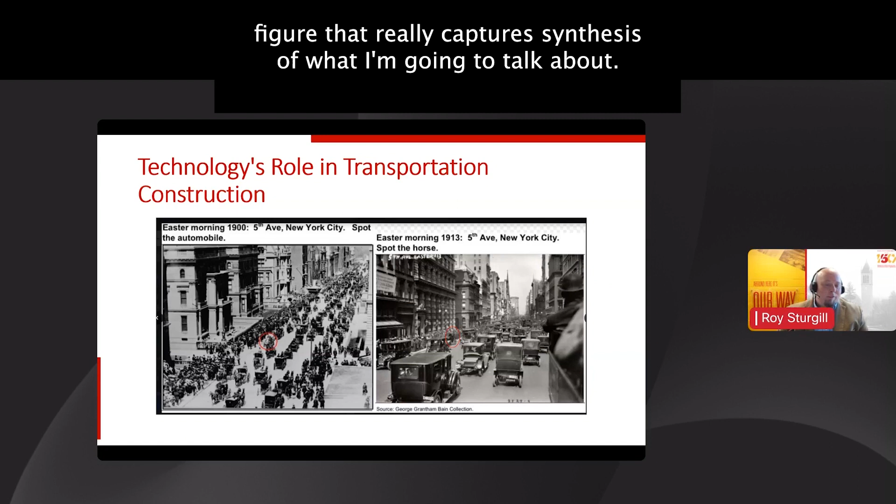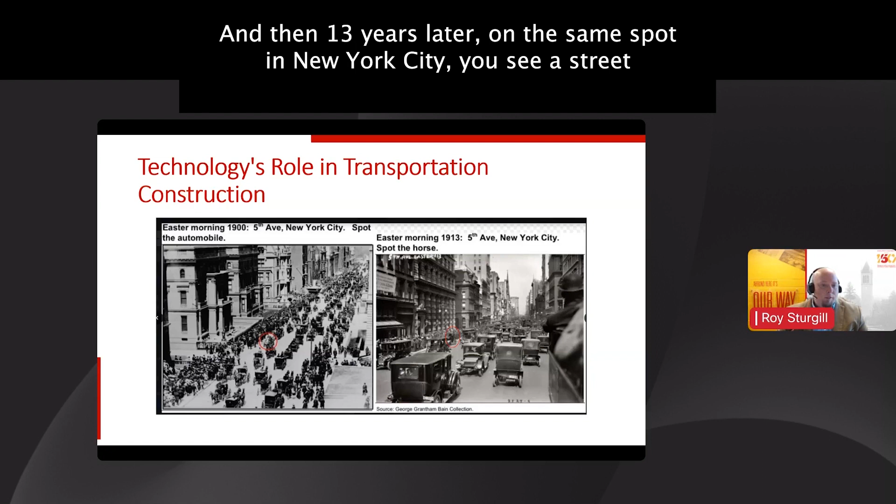I would like to start the talk today with this figure that really captures the synthesis of what I'm going to talk about. This is two photos on Easter morning, around this time of year. One is from 1900 of Fifth Avenue in New York City, on the left, showing a lot of horse-drawn carriages with one horseless carriage, as they called them at the time. Thirteen years later, on the same spot, you see a street full of cars and automobiles with only one horse-drawn carriage. The intent of the picture is to show how, in such a short amount of time, advancements occurred and technology changed society.

So that's what I want to talk about today: how technology has changed transportation construction. I want to tell the story through my own timeline. As David mentioned, I joined Iowa State in 2019 as an assistant professor in our construction engineering group. Prior to that, I started at the Kentucky Transportation Cabinet, which is the DOT in Kentucky, in January 2007.

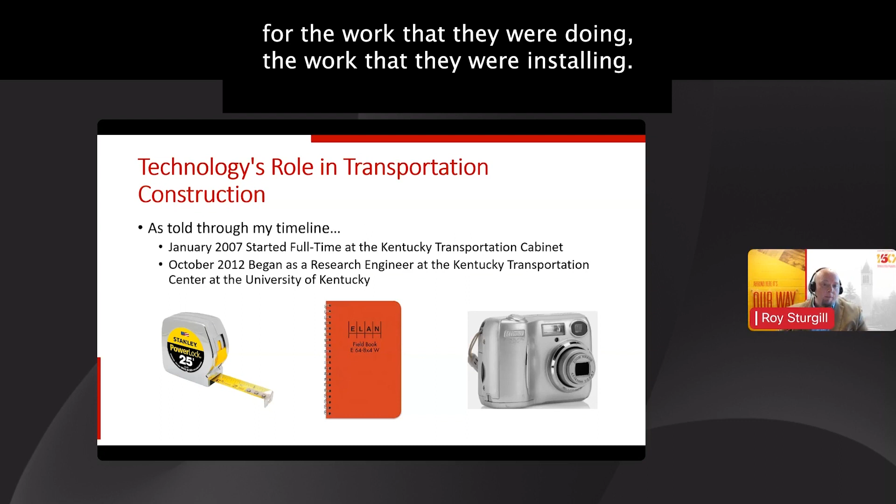At that time, I was in the field quite a bit. I conducted construction inspection, managed construction projects, and had to do a lot of documentation, a lot of measurement, a lot of making sure that the contractors were getting paid for the work they were doing and installing.

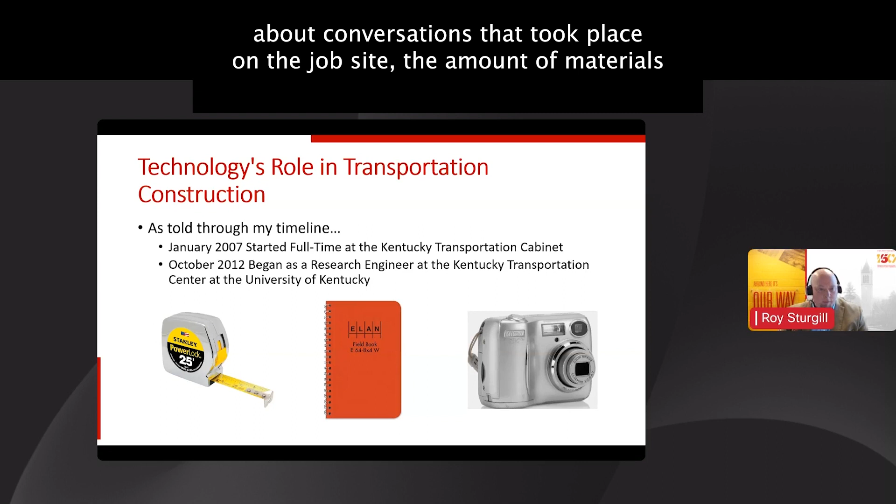Some of the primary tools of the time, the technologies I was using out in the field, were things like a tape measure — any inspector was going to have one close at hand. You also went everywhere with your field book, filling it out with information about conversations on the job site, the amount of materials measured, what needed to be paid for, issues, documentation, those kinds of things. At the time, you'd also find folks with just a normal digital camera to document those things.

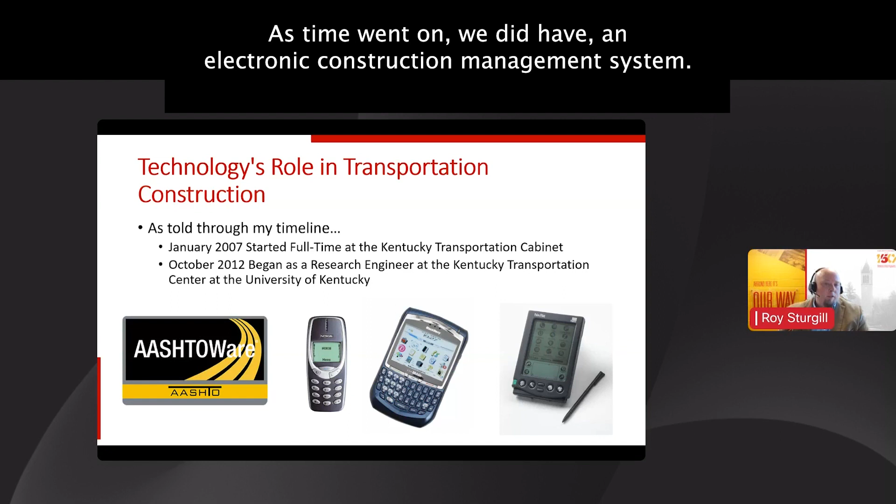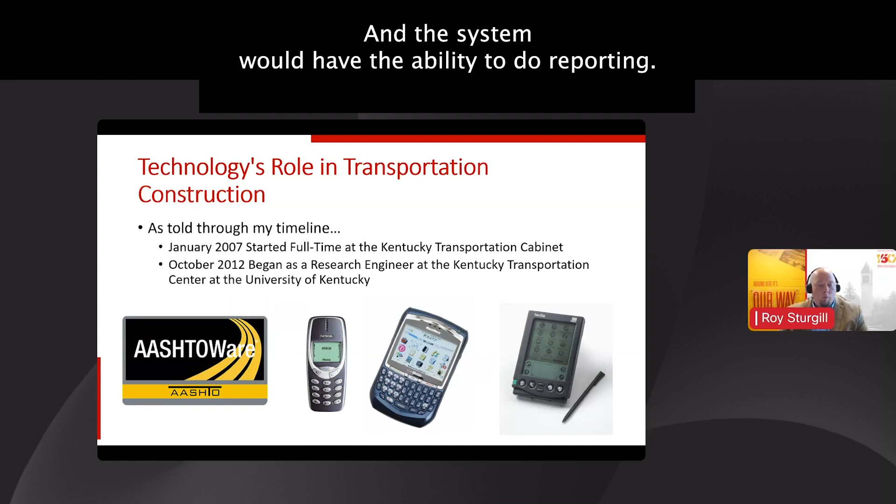As time went on, we had an electronic construction management system — an AASHTOWare product called Site Manager — but you didn't really have much access to it out in the field. You'd use the field book, take your notes, and then when you got back to the office, maybe the next morning, you'd transfer your notes and measurements into the system. The system could do reporting, help generate payments to the contractor, and process certain things with some level of automation and workflow, though still pretty high level.

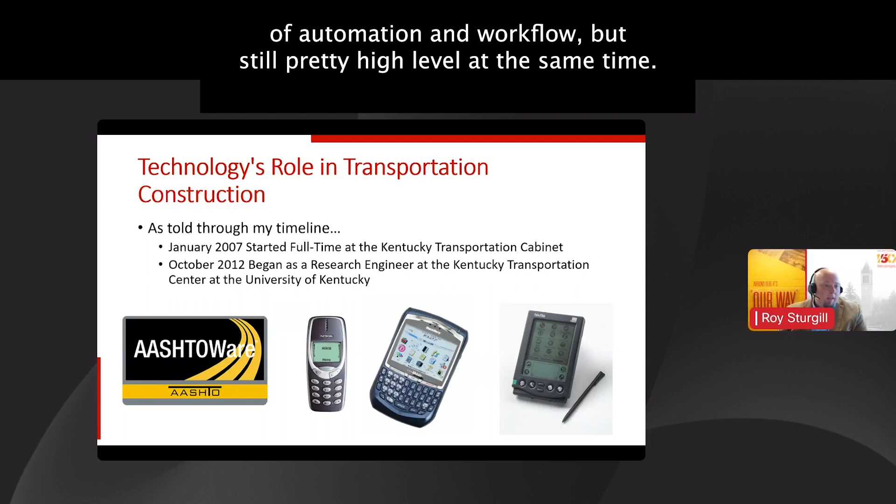At the same time, I counted myself lucky to get a state-issued cell phone. Pretty early in my career, around 2008, about a year after I started, I was issued a Nokia phone with very low functionality — essentially you could just place phone calls. We weren't even supposed to be using it for text messages at the time. So a pretty low-level technology mobile device out in the field.

But a few years later, I was actually issued a BlackBerry. If you don't know what a BlackBerry is, it's a mobile phone with a full keyboard integrated into it. It was a useful piece of technology — I at least enjoyed it. Wish I still had my BlackBerry some days.

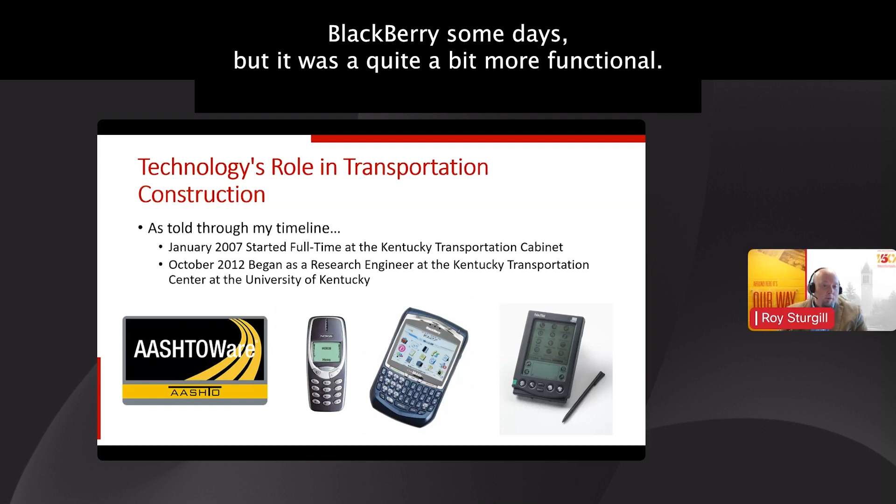But it was quite a bit more functional. You could respond to emails and enter information pretty easily. That was a decent piece of technology that I was issued while being at the cabinet.

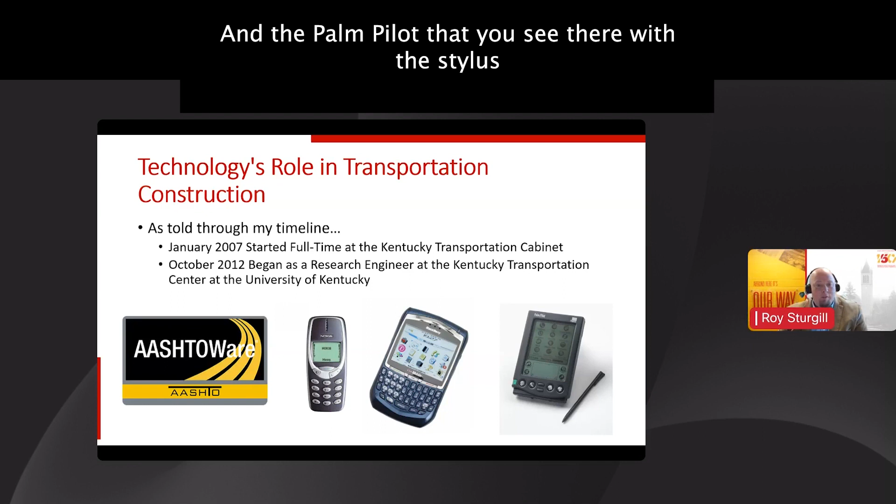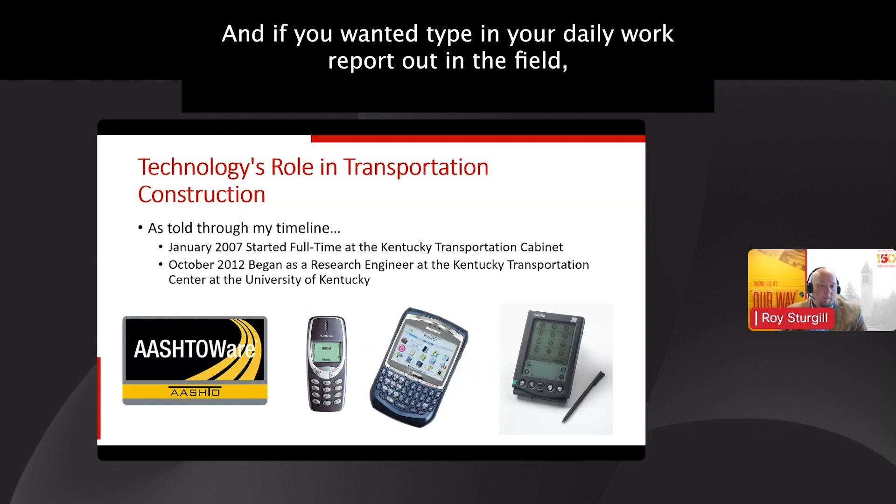I bring this up because we're going to talk about technology implementation today. The Palm Pilot with the stylus is an example of a technology we tried to implement at the Kentucky Transportation Cabinet, and it was pretty much a failure. There was an application on that Palm Pilot that could integrate with the AASHTOWare Site Manager software we used. If you wanted to type in your daily work report out in the field, you would meticulously use the stylus and enter each letter on the keypad that popped up on screen. Some of the issues were related to people, some to technology, and some to process—we'll talk more about those later in the presentation.

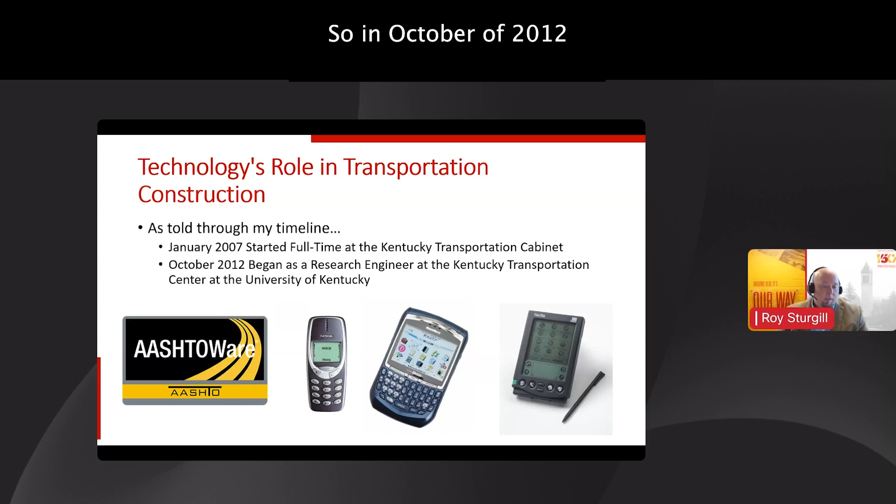In October of 2012 is when I actually left the Transportation Cabinet. I went to the University of Kentucky as a research engineer in the Kentucky Transportation Center, and shortly thereafter is really when I became interested in technology.

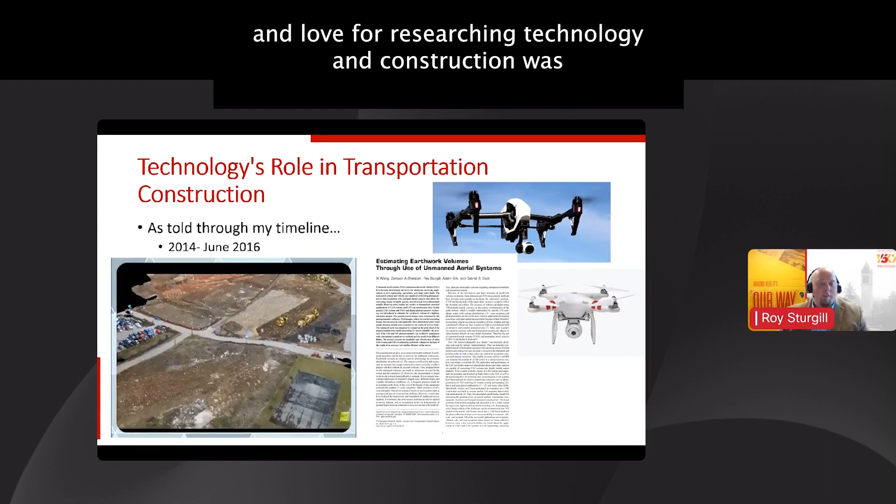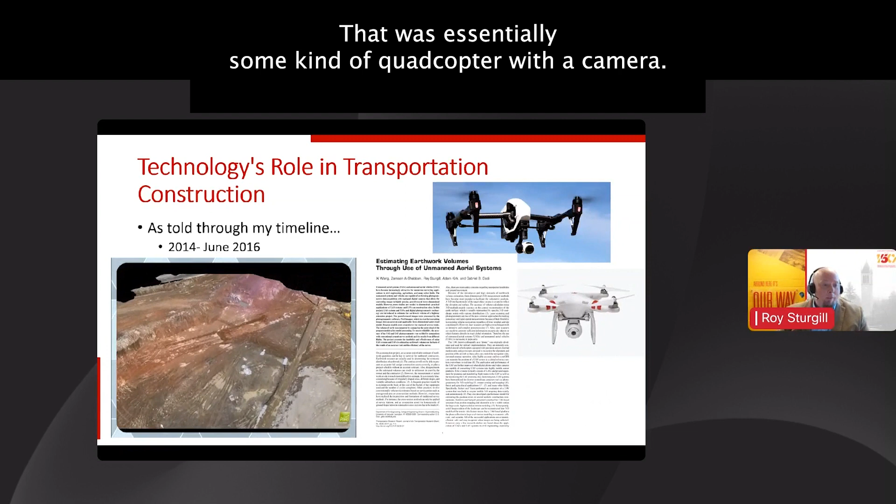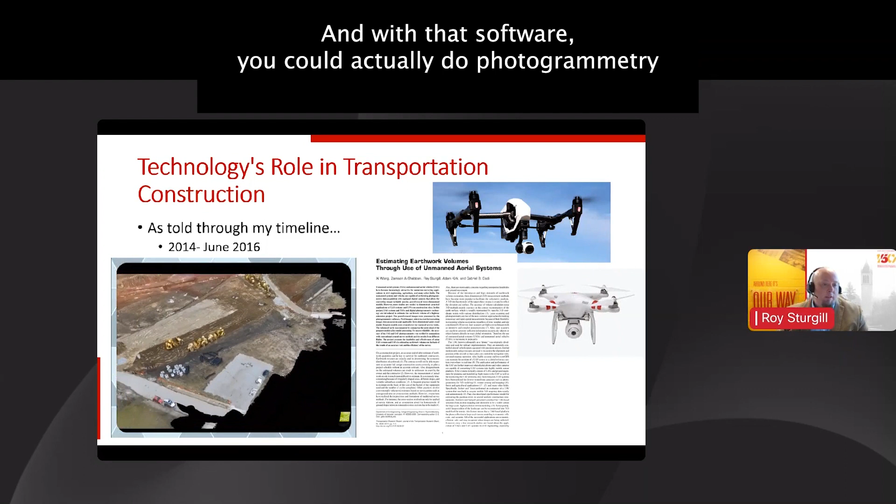One of the first pieces of technology we started researching, where I really found this passion for researching technology in construction, was when we got to operate what we called drones at the time, or unmanned aerial systems—essentially a quadcopter with a camera. We at first just used them for aerial photography or videography, but then found you could use software like Pix4D, which was used to capture the model video being played there, to actually do photogrammetry. The GPS on those unmanned aerial systems was advanced enough that the photogrammetry would come out pretty well done, and with some ground control points you could get really good data, which was the source of the paper shown there, estimating earthwork volumes through drone photogrammetry.

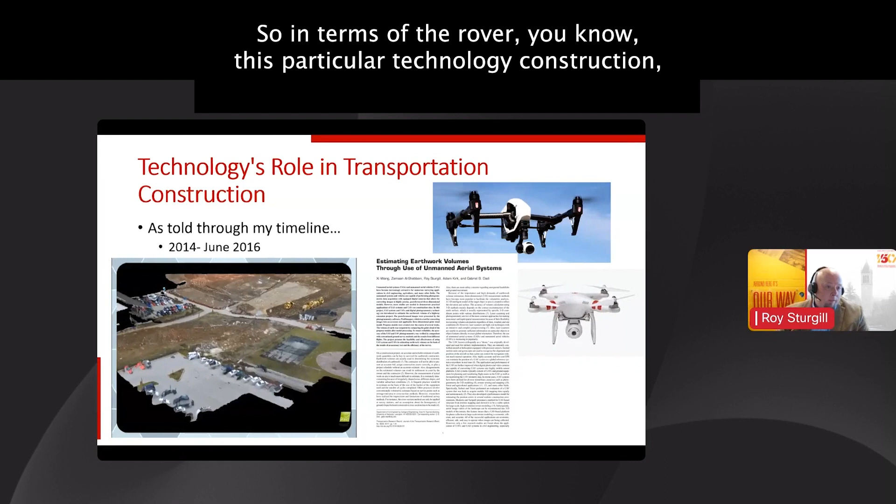In terms of the role of this technology in construction, you could use it to estimate how much earthwork was done in a given day by flying the site in the morning and again in the afternoon, calculating the earthwork volume differences between the two times.

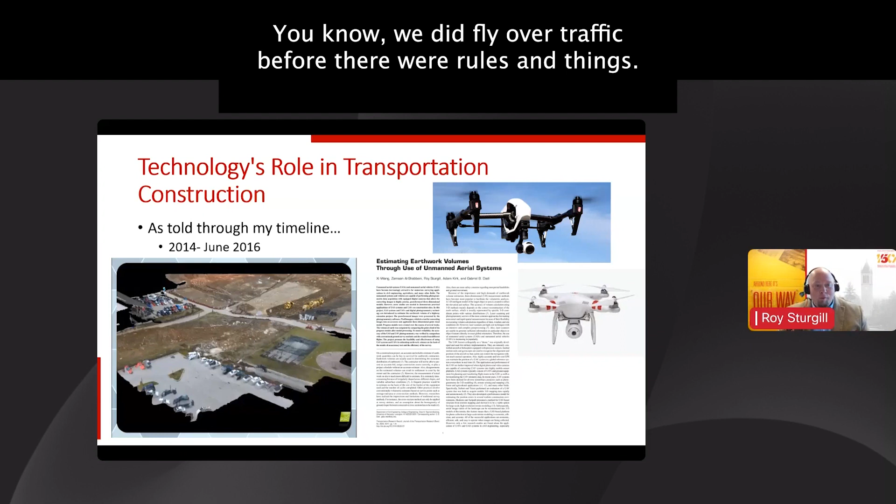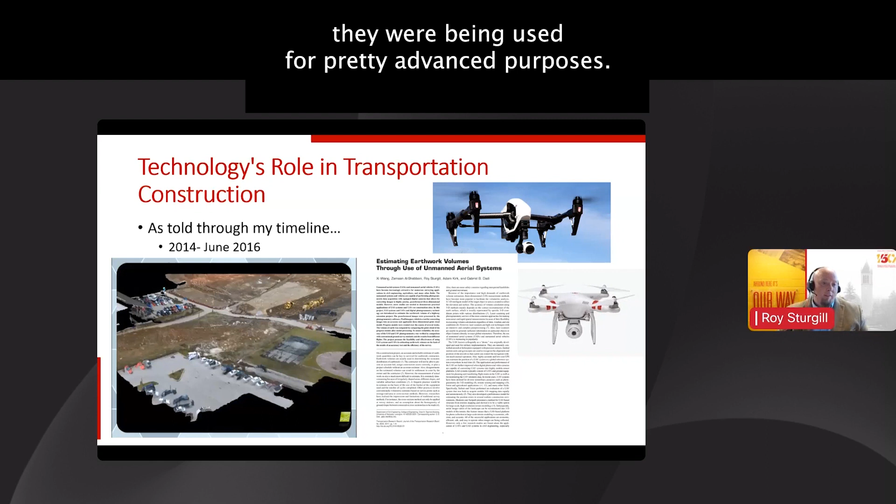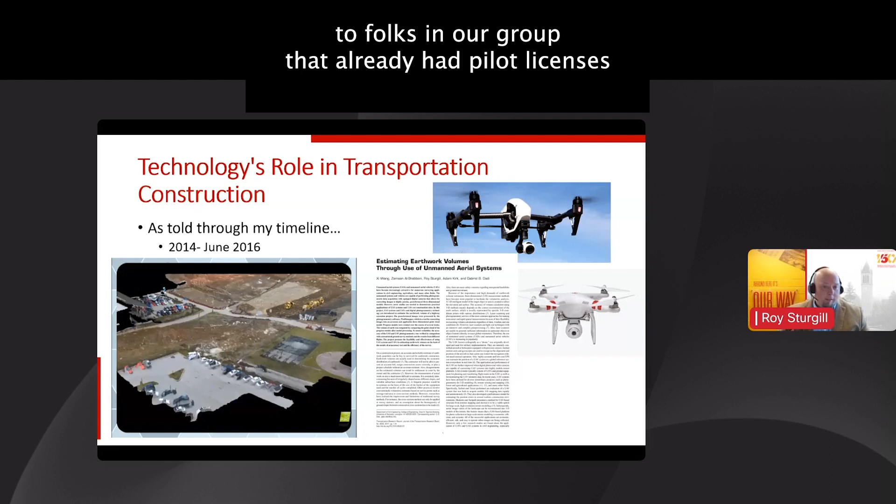One issue that happened—I'll admit maybe there were some things I did that the FAA wouldn't be exactly happy with. We did fly over traffic before there were rules in place. In June of 2016, the FAA issued guidelines, because with technology advancing so quickly, we don't always have the rules or processes in place to implement or adapt to them. This is an example where the policies weren't there yet—these drones looked a lot like toys but were being used for pretty advanced purposes. The FAA had to come out with a policy that included training folks on how to use these things appropriately and safely. Rather than myself getting licensed as a drone pilot, we shifted that to folks in our group who already had pilot licenses, and we moved on to the next thing.

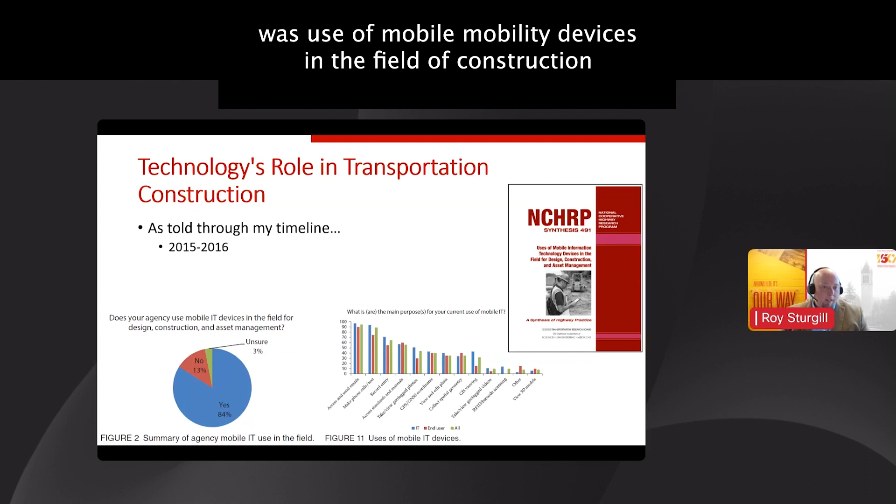As you watch these timelines continue, you see some of the advances taking place, just like going from the horse-drawn carriage to the automobile. Between 2015 and 2016, one of the things we looked at was the use of mobile IT devices in the field of construction, design, and asset management. This goes back to the cell phone and BlackBerry I was issued at the Kentucky Transportation Cabinet. In this study, we did a canvas of all the state DOTs to determine what they were using in the field.

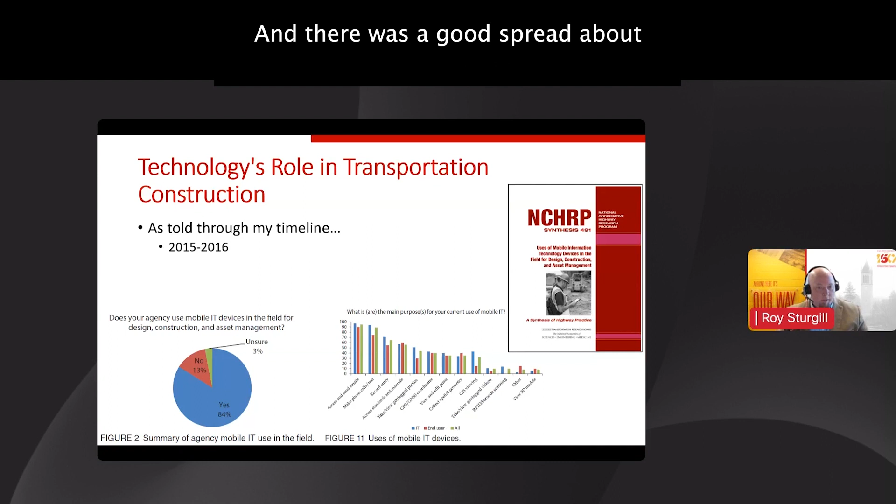As you can note, 84% were using some kind of device out in the field, but there was still a good portion that were not. And there was a good spread about whether it was a bring-your-own-device type policy, or whether it was an issued device, and what the device was, whether it was an Apple or Android device. There was all sorts of variation because the states were still trying to figure these things out.

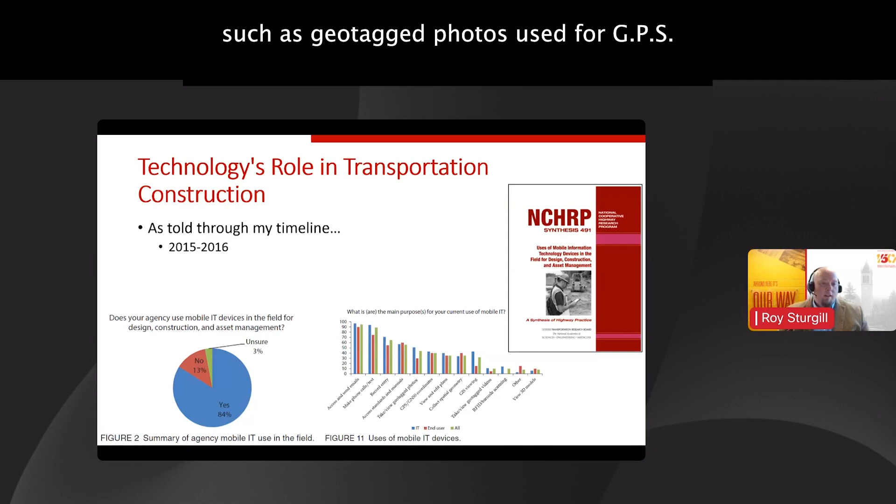For the most part, the use cases of this technology were just to answer emails, make phone calls, send text messages, and to a lesser extent use them in more advanced ways, such as geotagged photos, used for GPS, or even in a very small number of cases to view 3D models, which is something that we're looking at a lot more now.

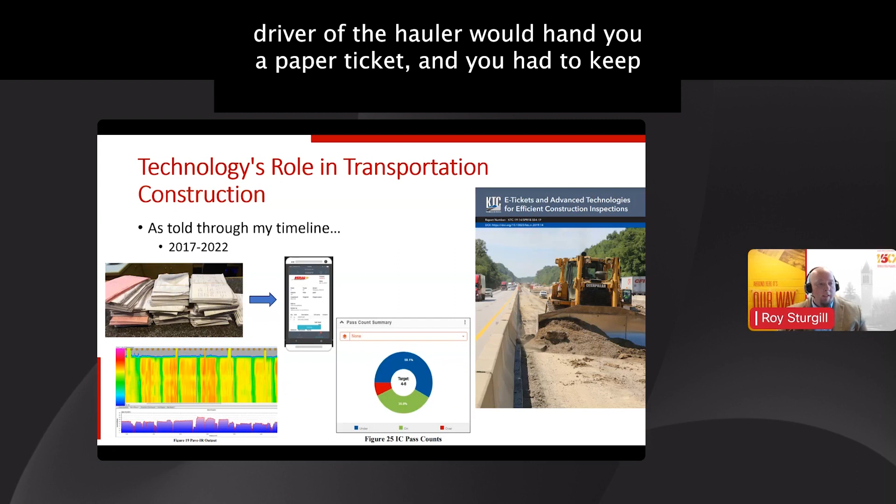The next thing that I got involved with, around 2017, was this discussion of e-ticketing. E-ticketing is basically for bulk materials, whether it's aggregates, asphalt, or concrete. The way DOT jobs would work was the material would show up, the truck driver or hauler would hand you a paper ticket, and you had to keep track of those tickets to determine how much material was delivered on site and verify that was the adequate or proper amount delivered, and that was what was paid for.

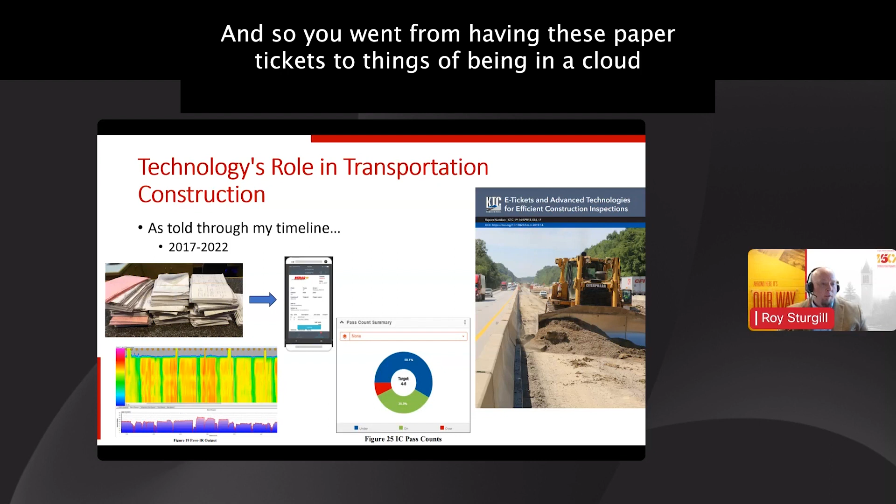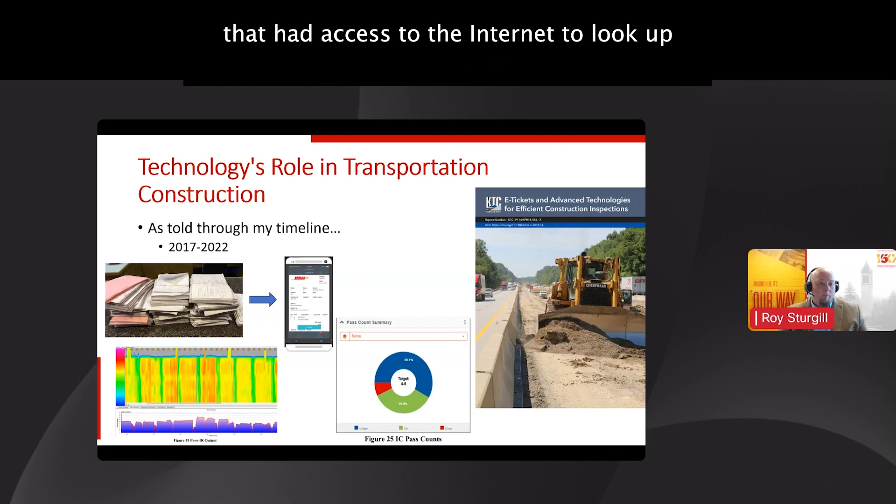So around 2017, it was actually the Iowa DOT who really pushed this concept of e-ticketing. It was out of safety, documentation purposes, and data continuity. So you went from having paper tickets to things being in a cloud with data flow happening automatically. Those tickets became e-tickets accessible by anyone with a mobile application and cellular service, or in an office with internet access, to look up what tickets were being delivered and accepted out on job sites.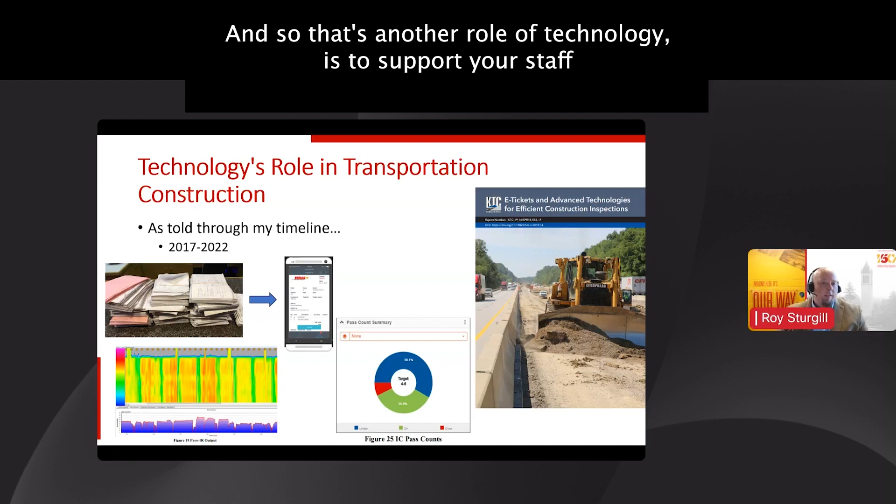One of the things we did in advance of, or in addition to, e-ticketing was try to couple it with other technologies to see how much we could support our field staff. That's another role of technology: to support your staff in the field or your management staff with being more efficient, having better data continuity, more details, those sort of things.

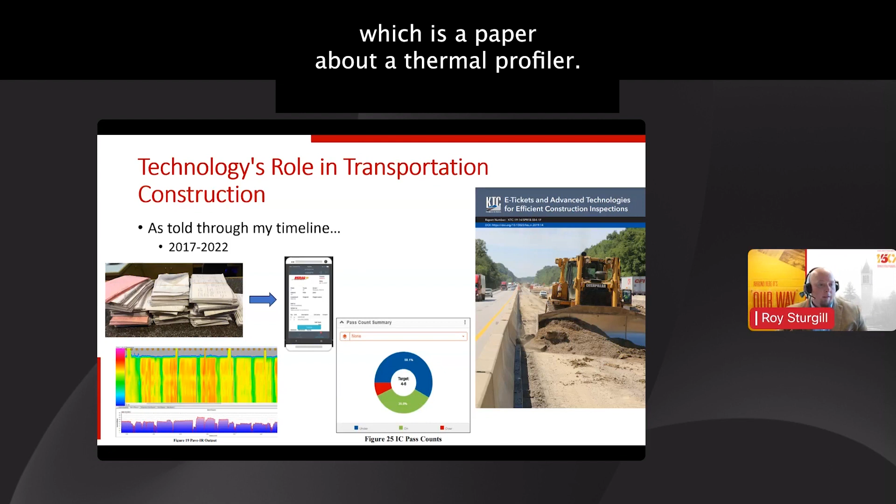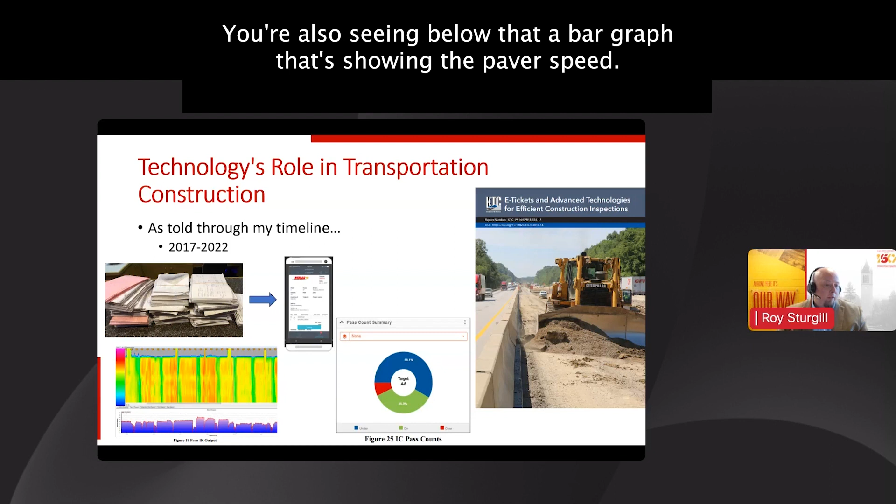This is one example where we used another system called PaveIR, which is a paver-mounted thermal profiler. You can see in the lower photo on the left a bunch of bands - some green bands and some yellow and red bands. That's showing the temperature of a pavement mat across the full width, and green is cooler temperatures. You're also seeing below that a bar graph showing the paver speed. So wherever the paver slows down or nearly stops is where you're starting to get colder spots in the pavement - that might be in between trucks or what have you.

But a colder pavement is not good for the quality of the pavement. So you were able to use this technology to identify potential issues with improving the thermal continuity and those type of things. We also used intelligent compaction rollers, not for their compactive numbers, but to monitor the pass counts or the coverage of the roller on the mat.

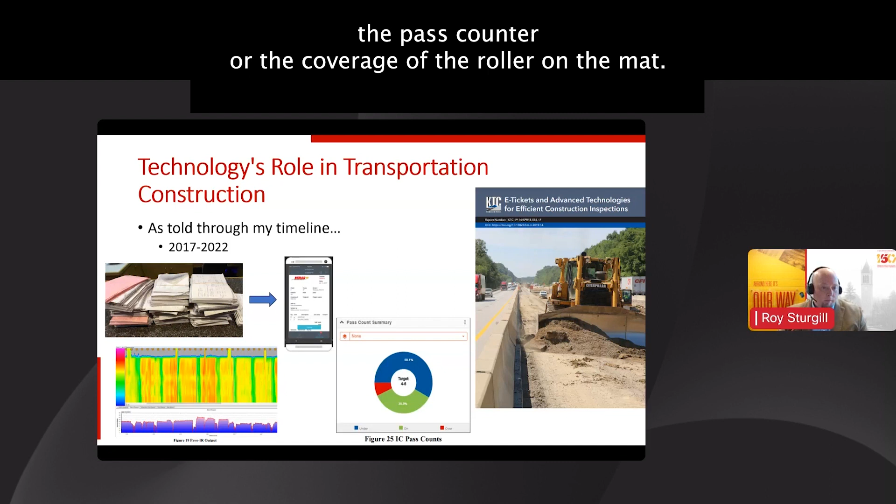So with these three technologies - e-ticketing, the PaveIR system, and intelligent compaction - we were able to couple those together and provide either an engineer or an inspector a lot of data that they otherwise would have had to collect more manually, but this was all being collected through the technology.

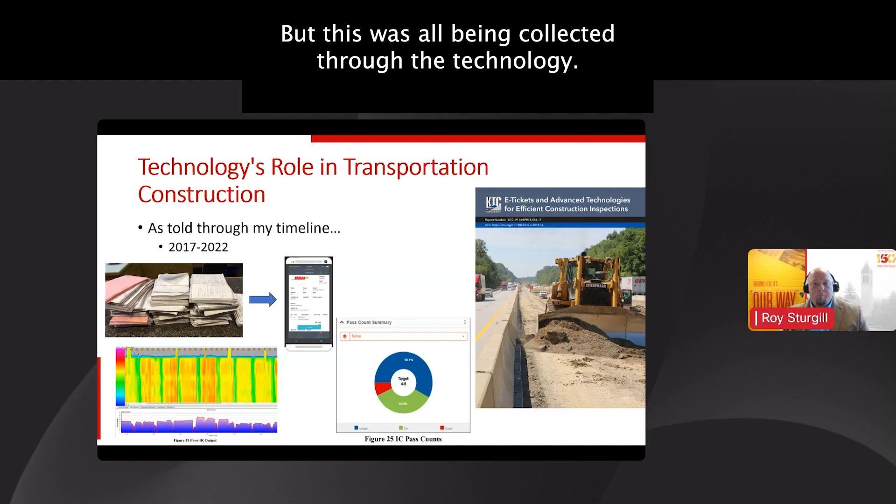But this e-ticketing concept really took hold, so we continued to look into it and actually did another nationwide canvas to determine how states were using it. At the time of this synthesis project, Synthesis 545, there were maybe a couple handfuls of folks who were experimenting with e-ticketing or using it. There were states like Iowa, Florida, Pennsylvania, and Kentucky that were really starting to ramp up their use of it, but it was still kind of new.

At the same time, I was fortunate enough to be asked to be part of the Every Day Counts initiative as a subject matter expert on helping to ramp up the use of e-ticketing.

While certainly that increased the use, there was one thing that increased the use of e-ticketing more than anything else, and that's the COVID-19 pandemic. A lot of times we talk about the pandemic in a very negative tone. However, as technology is concerned, the pandemic really pushed us into making use of some technologies that were just on the forefront, just getting used preliminarily, and e-ticketing is one of those. Virtual meetings too - think about before and after the pandemic, how much more we are using technology day to day.

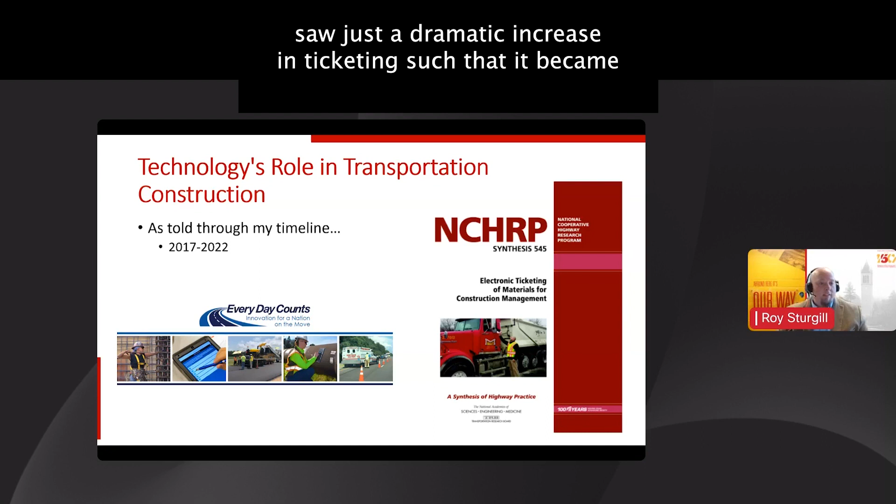So that was one of the positives, it really pushed states to adopt the e-ticketing concept. From 2017 to 2022, we saw a dramatic increase in e-ticketing, such that it became, as part of the Every Day Counts program, the number one most implemented technology of any technology that was part of Every Day Counts.

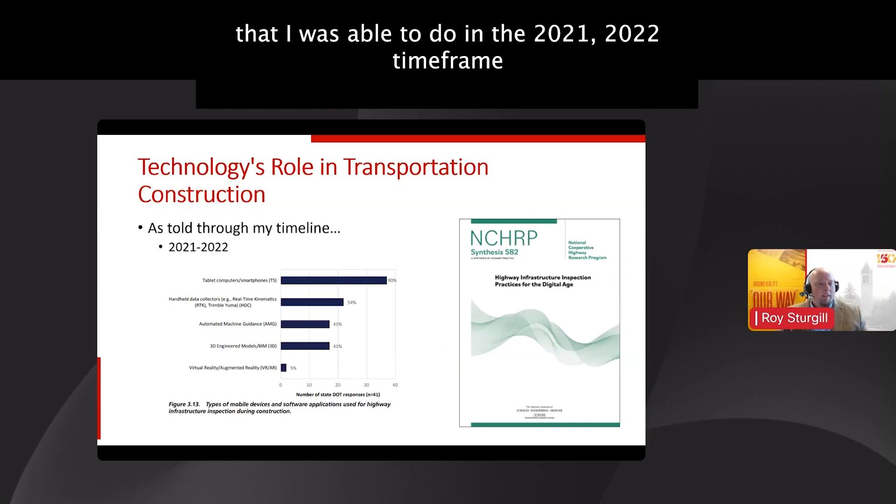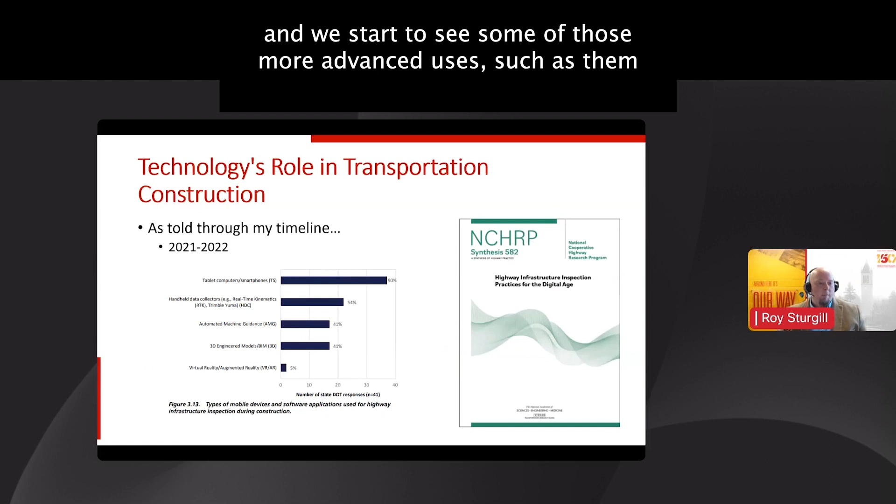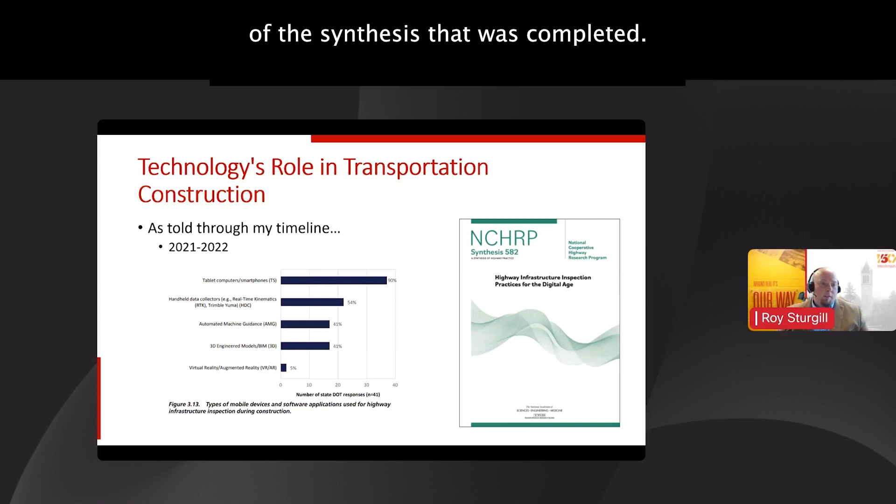That's quite impressive. Continuing on with these synthesis projects, another project I was able to do in the 2021-2022 timeframe was highway infrastructure inspection practices for the digital age. What I want to call attention to here is that from that early mobile IT synthesis to this synthesis, we really start to see mobile devices in the field become commonplace. And we start to see some of those more advanced uses, such as them being used as data collectors, to collect geotagged data, or for viewing 3D models or 3D engineered models, or in BIM practices, really start to ramp up compared to that previous version of the synthesis that was completed. So you see how these technologies in a very short period of time are being advanced in use.

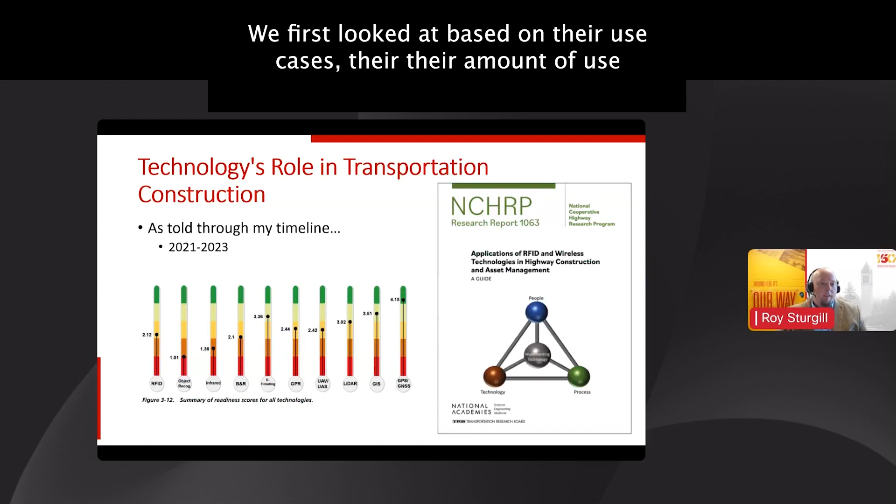One other project I was fortunate to be part of was the application of RFID and wireless technologies in highway construction and asset management. As part of this project, we looked at 10 different technologies and how they were being implemented in the field. We first looked at, based on their use cases, their amount of use by DOTs and that sort of thing, and assigned them a readiness score.

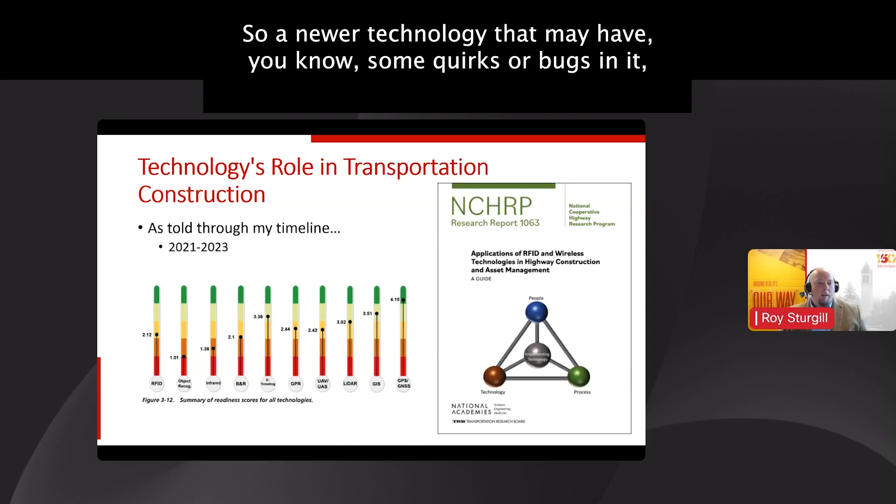But this is really where the concept of the importance of people, process, and technology was highlighted, to make us understand that implementation isn't just about having a good technology. You really have to make sure that the people using it at all levels, all the stakeholders, understand what the purpose is, how it's being used, how it might be useful to make their job easier, more efficient, collect richer details. There needs to be buy-in into the technology. The other thing is the technology has to be mature and ready for the implementation process itself. A newer technology that may have some quirks or bugs in it is going to frustrate people if it's not ready, so the technology has to be there.

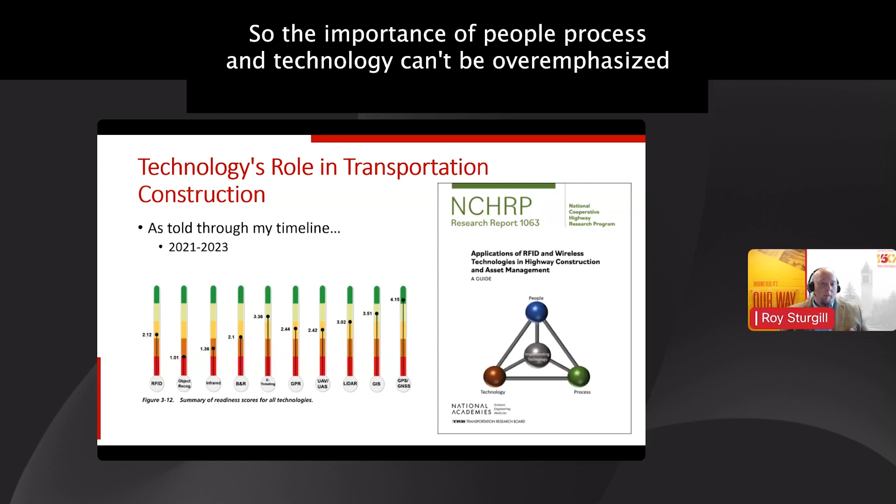Also, the process has to be prepared for any kind of workflows or digitalization of the data that's coming in. There needs to be a place for that information to go, and there needs to be a workflow to help it go from one person to the next through the process. So the importance of people, process, and technology can't be overemphasized when it comes to implementing technologies, especially in construction.

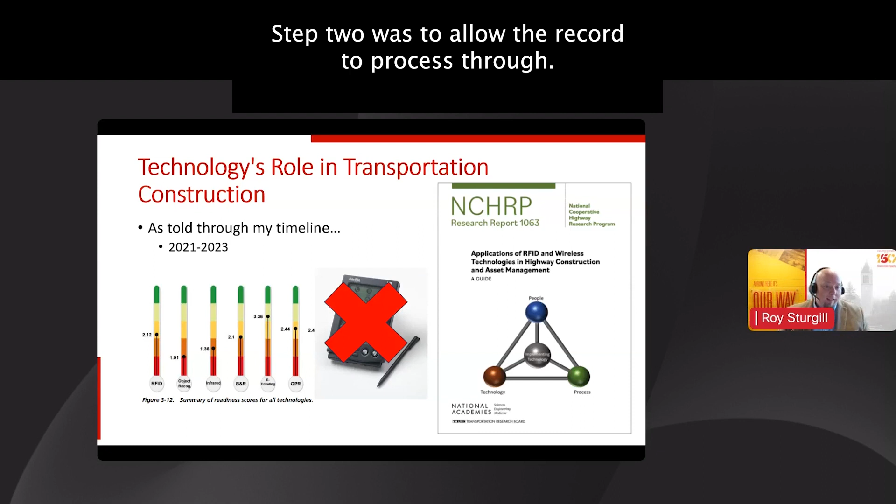So we'll go back to the Palm Pilot that I mentioned before. The technology wasn't quite mature. There were issues with it where you could type in your daily work report - and I did this on a couple occasions - where you typed in the daily work report, and as part of the workflow process that was set up with the technology, step one was to delete your records, step two was to allow the record to process through. So if the workflow of the data from the Palm Pilot to the computer got disrupted by some issue, which happened frequently, the record was gone. So many people lost the time they had spent putting that record in out in the field.

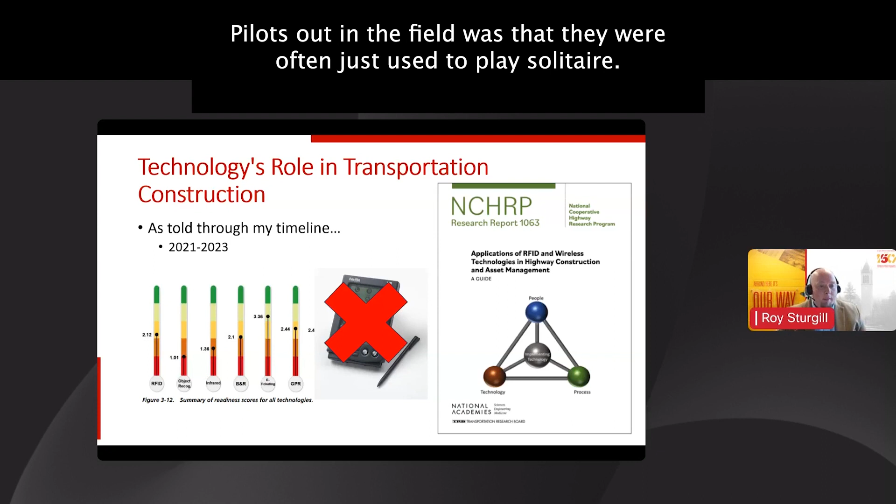So the technology wasn't quite there. The people were never really trained or shown how to use this. And quite honestly, what feedback we got in central office about the Palm Pilots out in the field was that they were often just used to play solitaire. So the people need to understand how to use the technology and how it can benefit them. And then finally, the process has to be set up to where it is efficient.

The data flows completely without being deleted or lost, and all those three things have to work together. That was a really key project in taking the next steps with technology to make sure that implementation can take hold and take place.

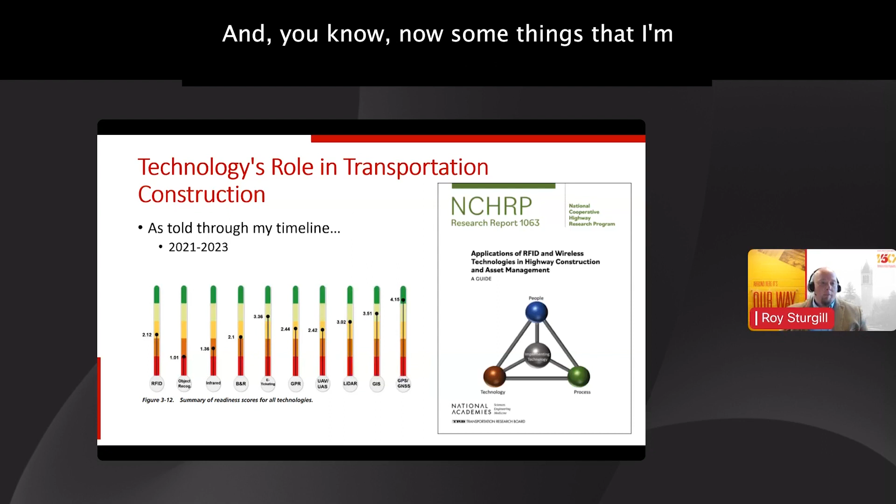That was completed relatively recently, and now some things I'm looking at include 3D models. Currently I have an NCHRP project, 10-111, where we're trying to develop a guide for 3D model viewers for construction inspection. There's lots of different model viewers out there.

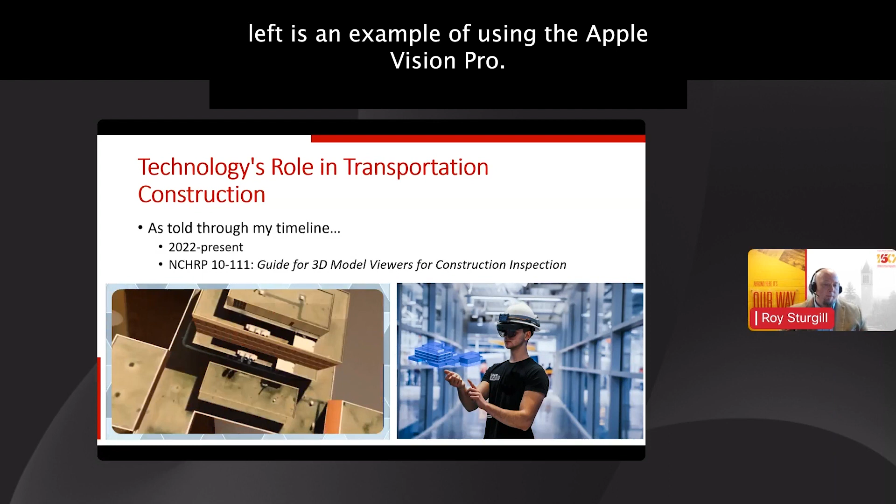Some in the vertical sector are using the XR10 hard hat with HoloLens from Trimble, shown in the photo on the right. The example video on the left shows the Apple Vision Pro. There's also the Meta Quest and several other face-mounted 3D model viewers on the market.

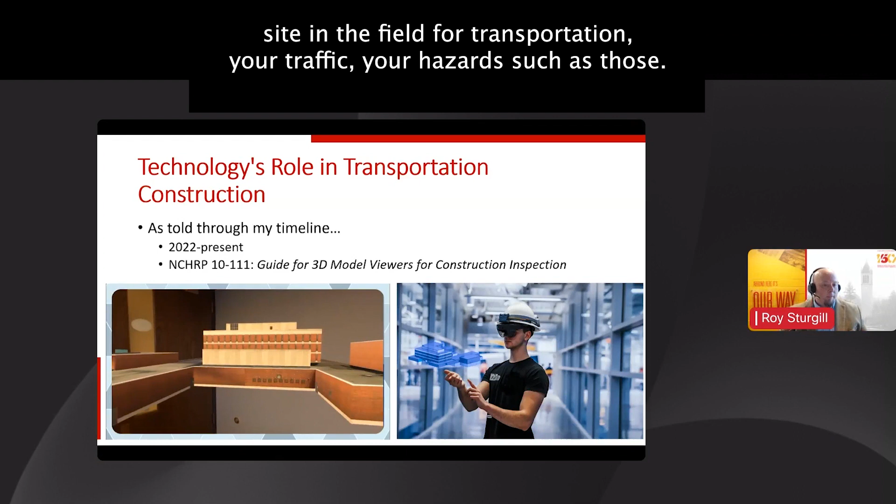But for the transportation sector, the finding is that you don't want anything face-mounted when working at a live construction site in the field, near traffic or hazards like that. So really they're moving more toward tablets, with a 3D model viewer you can manipulate and still see that 3D model, but without anything impacting your view or vision. So that's one project we're looking at.

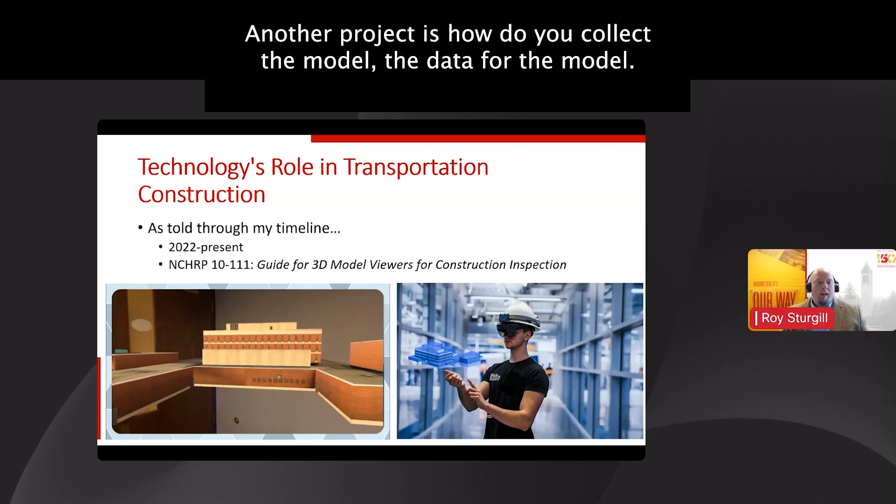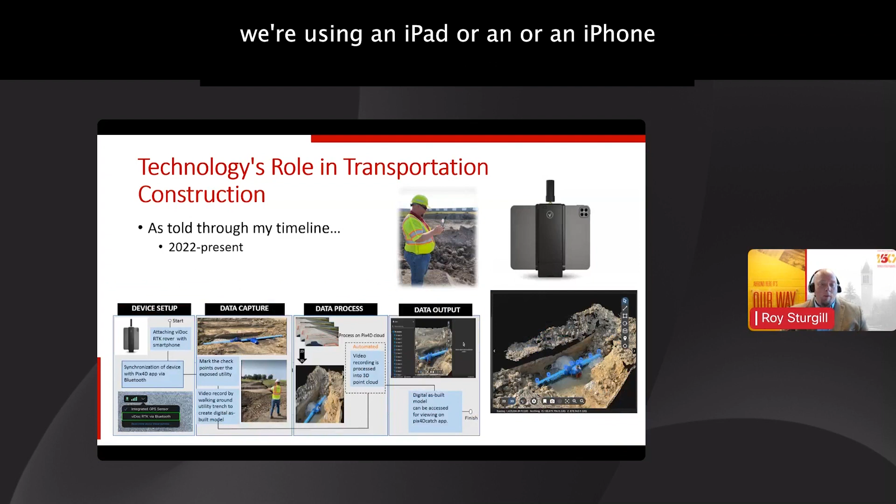Another project is how do you collect the data for the model. There's some ongoing work where we're using an iPad or iPhone with a device called ViDoc, and that ViDoc makes the GPS of the iPhone or iPad RTK corrected.

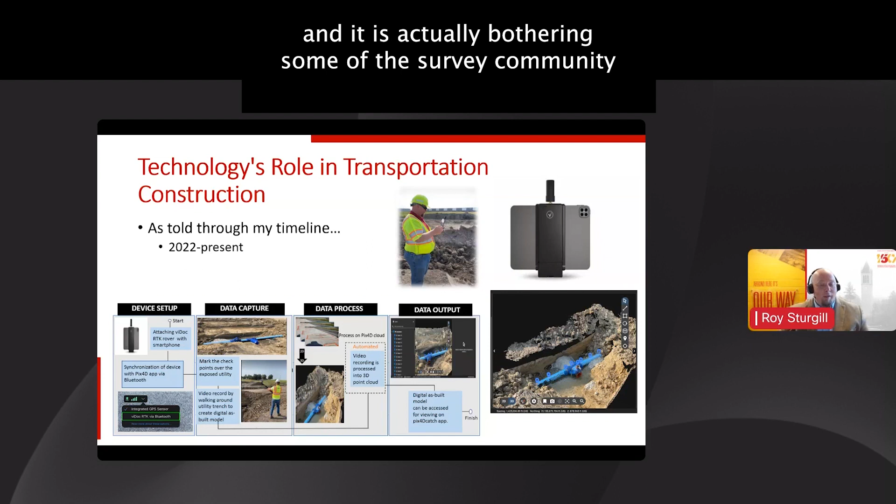It's a little bit like being a surveyor, but it's not, because we're not licensed surveyors, and it is actually bothering some of the surveying community about how accurate the data can come in and how it gets represented. So you have to be careful about not representing it as anything that's been surveyed.

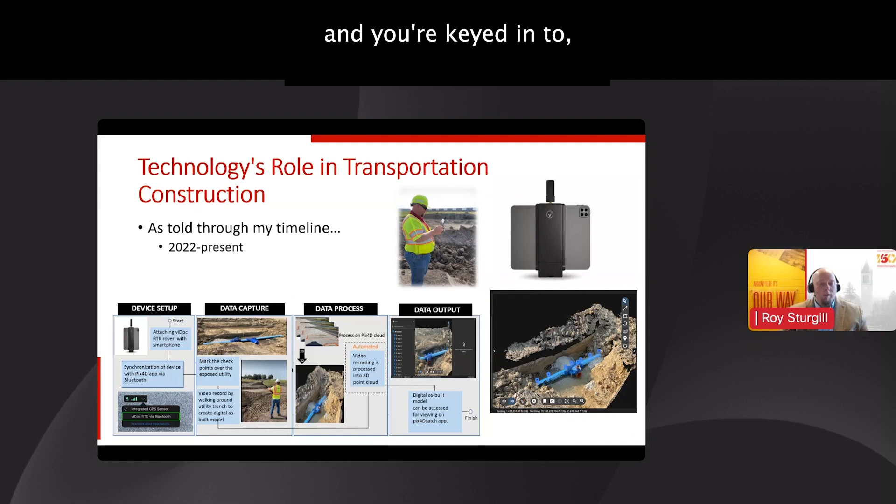But you do get these 3D models using photogrammetry, and in some cases, when the satellites are right and you're keyed into a base station or a CORS network, you get correction such that you have accuracy to less than 3/100ths of a foot, all by just walking around.

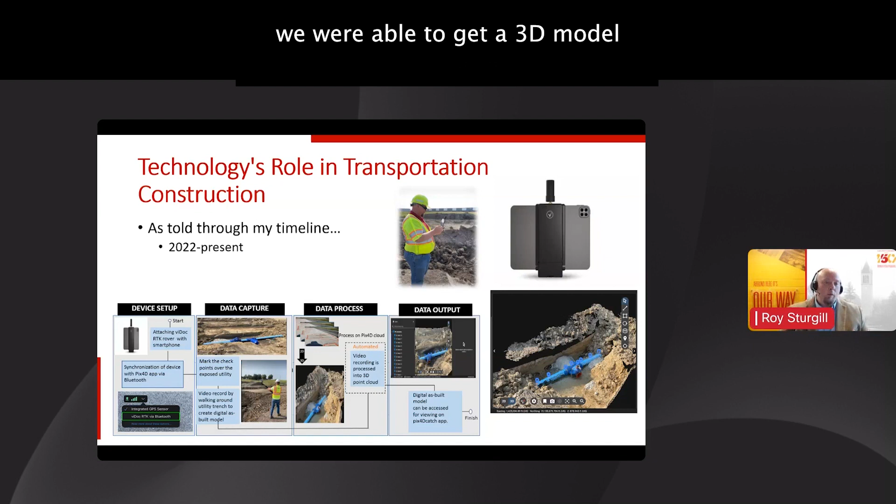So the example here, you have a 20-foot or so pipe, and in walking around that trench, which took 20 seconds, we were able to get a 3D model accurate to within 3/100ths of a foot. Very exciting things you can do with technology to enhance the richness and detail of data collected in the field.

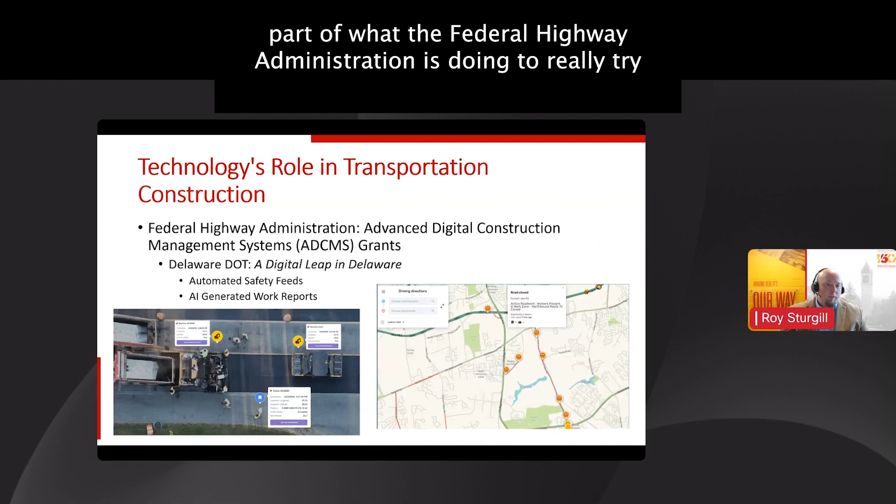Some newer projects that are just starting, part of what the Federal Highway Administration is doing to increase technology's role in transportation, is by putting out the Advanced Digital Construction Management System grants. ADCMS grants were issued a little over a year ago. I'm fortunate to be part of 2 of those grants, and they're really exciting, with some great things coming from them.

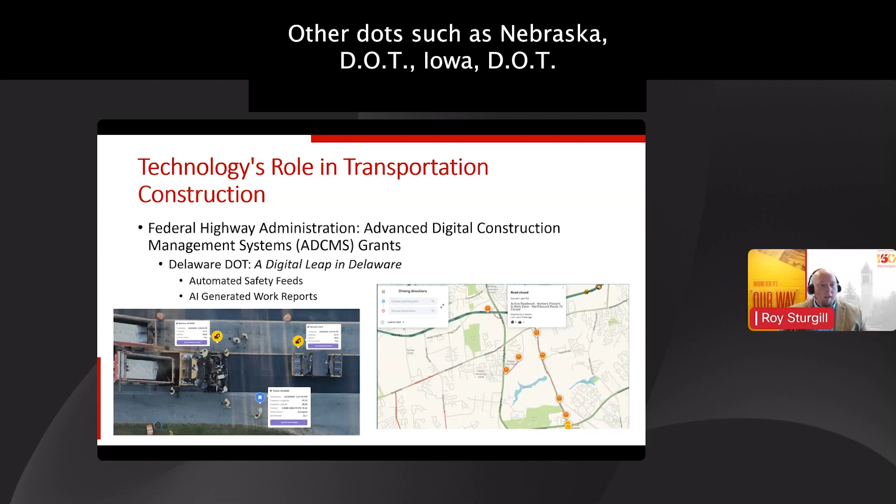The first one I'll talk about is with the Delaware DOT. This project includes partners from HaulHub, WSP, and other DOTs such as Nebraska DOT and Iowa DOT, all part of this team where we're looking at how data collected from the construction equipment can inform and be used by the owner, by the DOTs, for their purposes.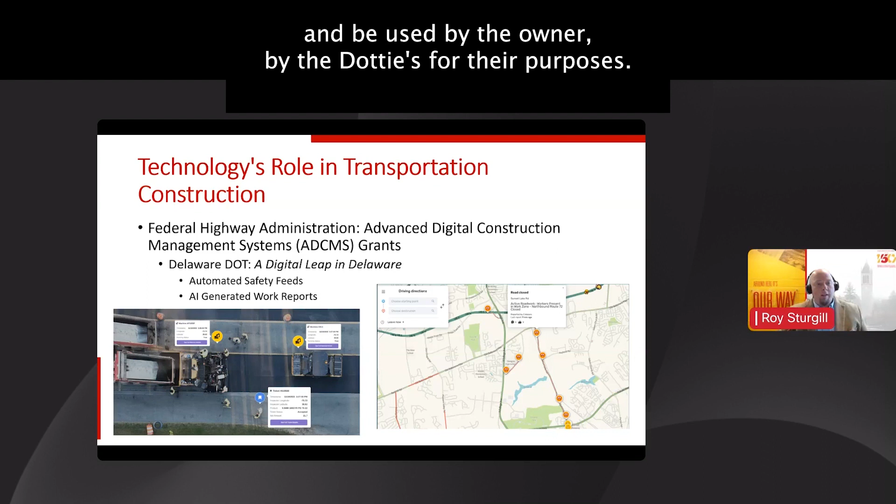Some examples already being used are automated safety feeds, where if a paver or rollers are operating, it keys in and lets Waze know that it's not just a construction site, it's an active construction site, with people on site, so drivers need to slow down and be cautious. Waze can even help reroute traffic around those zones.

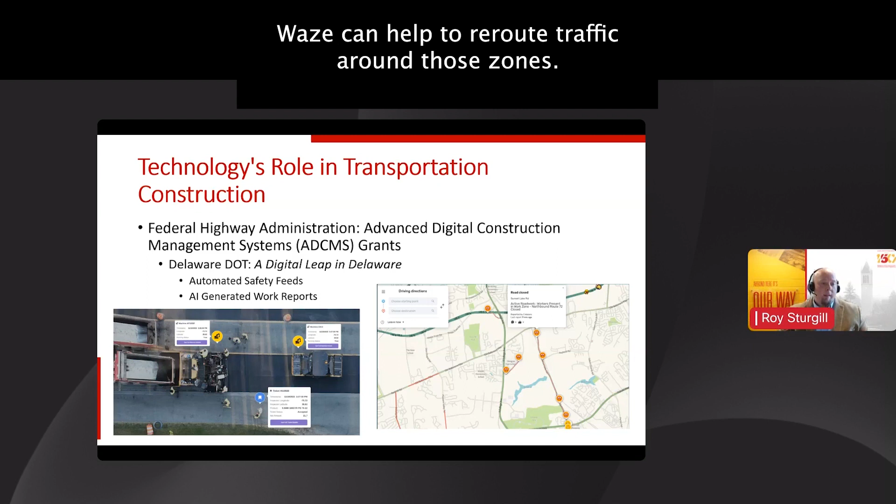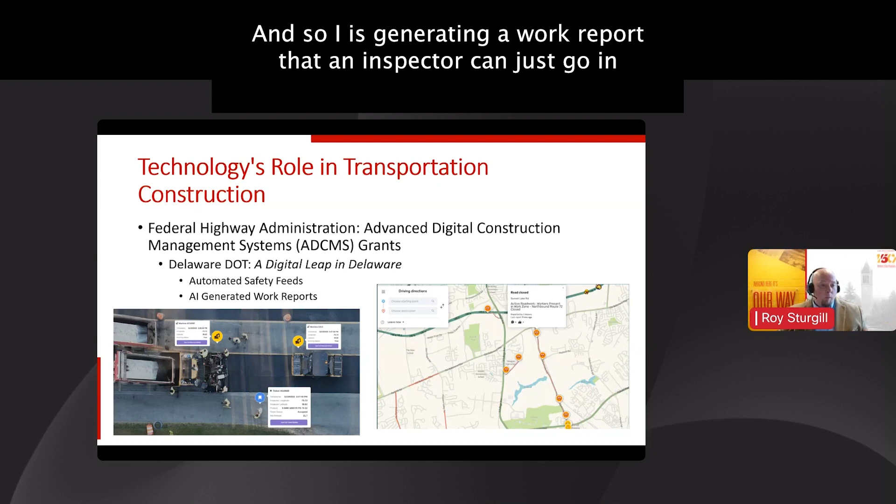The other thing that's quite interesting is that data is being fed in from the construction equipment, and we're able to use AI to generate work reports. We know where the paver is operating from one point to the next, and how much material is going through the paver via e-ticketing. So AI generates a work report that an inspector can just go in and manipulate some details to make sure everything's correct, building efficiency and saving time for those folks as part of this project.

And there's more to come. We're just now starting to look at what data we're able to capture from the different pieces of equipment.

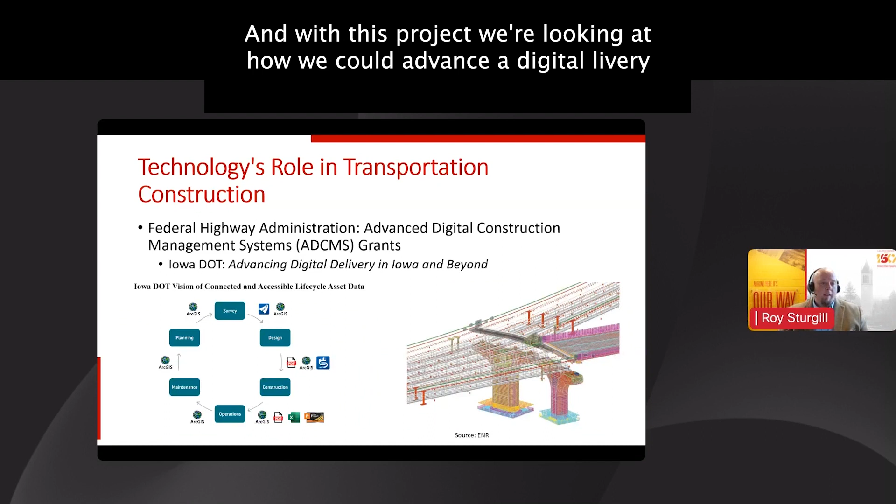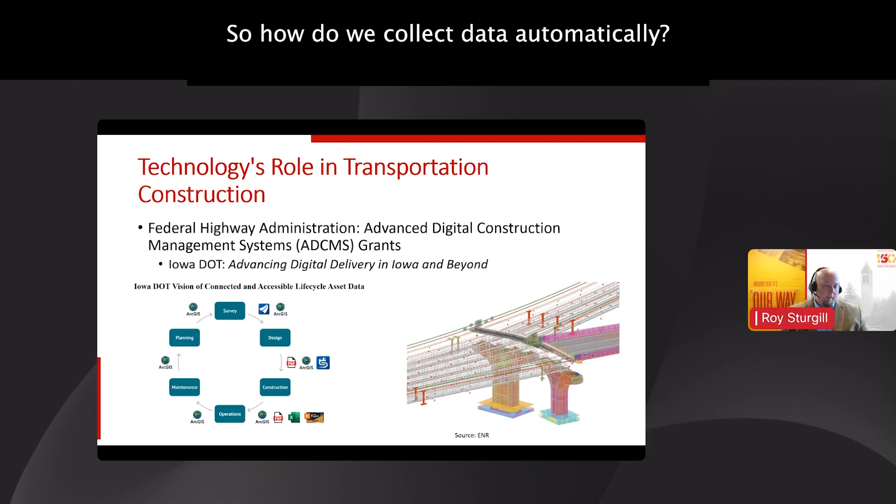The other ADCMS project is with the Iowa DOT. With this project, we're looking at how we could advance digital delivery in Iowa and beyond. We're looking at, from construction, all the data that we're collecting, how do we make the workflow and the process seamless to where the data flows through the life cycle of the asset. So from design into construction, into operations and asset management, and then back around when we go through that next level of project. So how do we collect data automatically? How do we use it for design? How does that design go and inform what's done in construction? And how do we provide updates to that data that then goes in and informs asset management and around the cycle again?

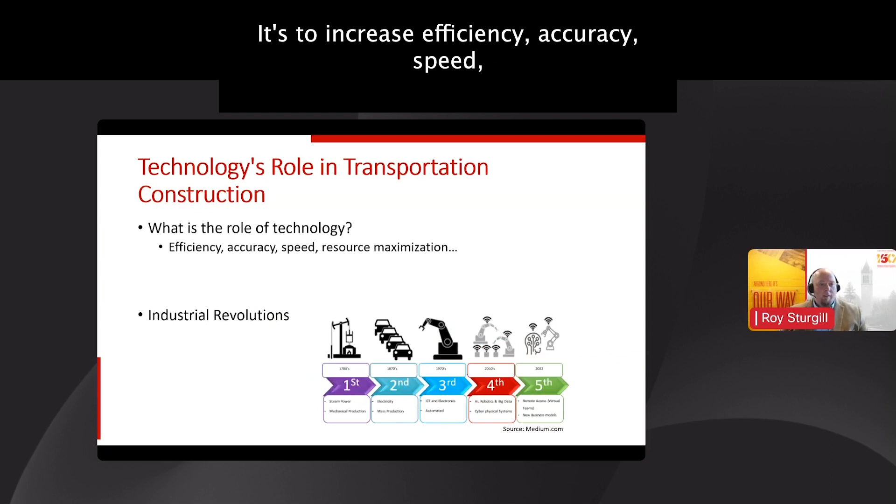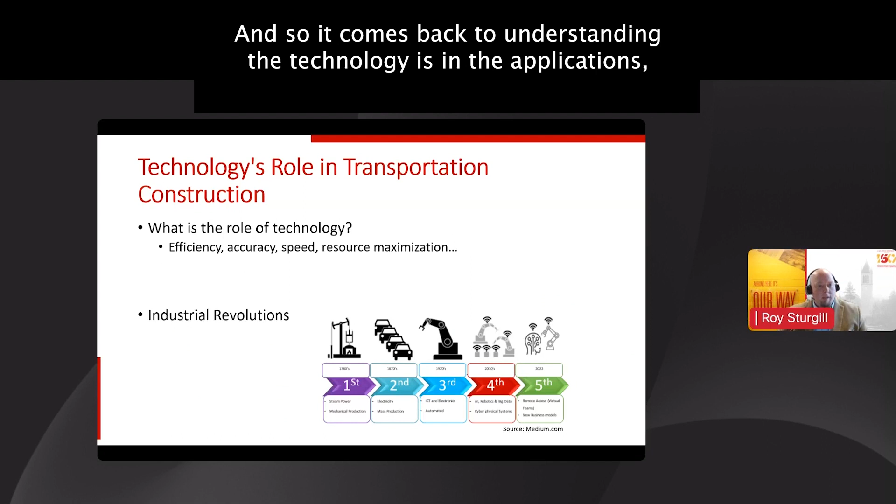So to sum up the role of technology in transportation construction: it's to increase efficiency, accuracy, speed, to be a resource, and to maximize the resources that we have in the field. We hear so much about staffing and workforce shortages, and technology is trying to fill that gap. So it comes back to understanding the technologies and the applications, the people, process, and technology of how we can implement these things and then be effective.

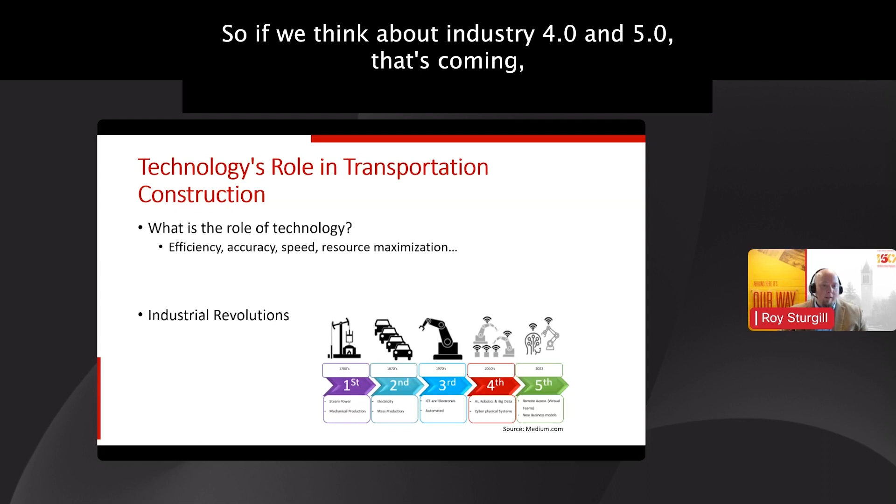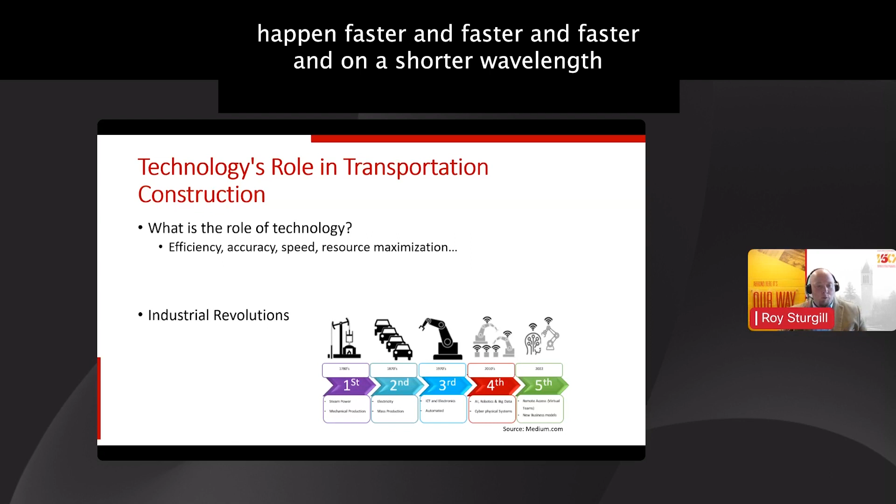I wanted to come back to the fact that it also seems like all this is really speeding up. If we think about the industrial revolutions - Industry 4.0 and 5.0 that's coming or that's here - you look at the dates: the first industrial revolution was the 1780s, the second the 1870s, the third the 1970s, and the fourth in the 2010s, and now the fifth. We're really seeing those revolutions happen faster and faster on a shorter wavelength because technology is growing and moving so quickly.

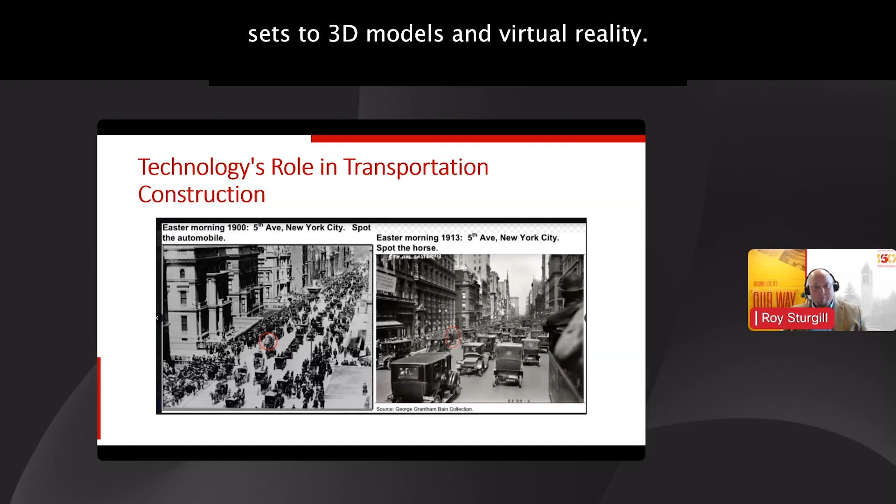To close up my presentation before we go to questions, I take us back to the first slide I started with. If you think about the technology I just explained through what I think is a fairly short career for me, it's within a window of time not too different from what you see here. So instead of going from horse and carriage to the automobile, we're going from paper plan sets to 3D models and virtual reality.

But we're also seeing that in the equipment itself. I didn't talk a lot about how, from the contractor's perspective, telematics and automated machine controls that make the contractor more efficient have been around for a long time. Actually, the ADCMS project with Delaware, we're communicating with the equipment vendors to give them the other side of the story. For years they've been hearing from contractors wanting to automate what they're doing and increase their productivity through machine guidance, machine learning, AI, and other technologies to make them more productive.

But the other side of the story is, the DOTs could use some of that data too. There may be things that could easily be captured that would help the DOTs be more efficient. So when we're talking with equipment vendors, they say, oh yeah, we can capture that data, it just wasn't something the contractor was interested in. I think that project's really neat, hearing from contractors and equipment vendors that there's a lot of low-hanging fruit we can get for the DOTs and make it a more collaborative environment. That's another benefit of technology in construction, it helps us be more collaborative between owner, contractor, and other stakeholders.

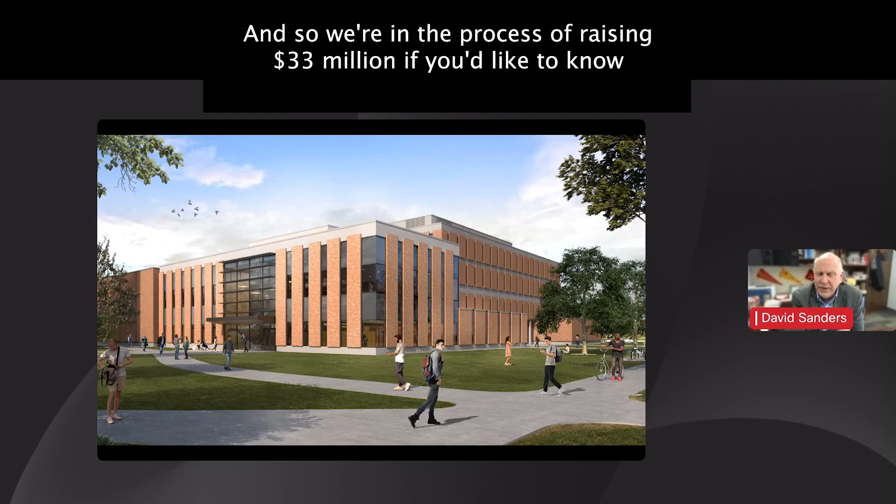But as I mentioned, the building was first occupied in 1971, which means it was designed in the late 60s. So things, just as Roy's talked about, technology changes. There's been a lot of changes in technology of teaching in the last 50 years. We're looking to expand to the south, but it's a fully non-state funded addition, and we're in the process of raising $33 million.